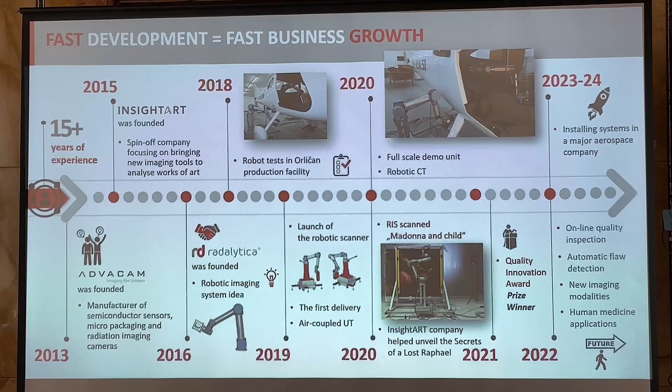It's a company here in the Czech Republic, PSI, which builds automatized greenhouses for phenotyping. They study the growth of plants, building greenhouses to study plant growth, and they measure all sorts of parameters of these plants. They wanted X-ray imaging stations, so that was our first customer. But now the focus is mostly on space and aerospace industries.

So the basic principle, I can probably go through very quickly, everybody in this room knows it. X-ray imaging is a game of shadows, so we are also measuring shadows. The difference is that we have the photon counting detector on one of those robots, and photon counting detectors bring lots of advantages for X-ray imaging, better image quality. They are opening new applications which were not possible with older types of X-ray imaging detectors. Jan Jakubek will be talking much more about photon counting detectors in detail later, so I don't want to dive into detectors.

Nevertheless, we are using smaller robots, universal robots, and we are trying to make the system portable. Why portable? Computed tomography is nowadays a very well established method in the medical field, but also very much in industry. There are all kinds of imaging systems: you can have high resolution for small volumes, you can have large volumes, you can have all kinds of industrial CT machines, including robotic ones, as we heard from Gabriel just minutes ago.

The point is, all these machines require that the sample goes to the machine. You can only inspect things that fit into the CT system or the cabinet that you have around it. However, there are many objects that are way too big to fit in any kind of CT machine. So in reality, the need is to make the system smaller again and use some different, clever approaches for how to enable inspection of such a large object, such as an aircraft or spacecraft.

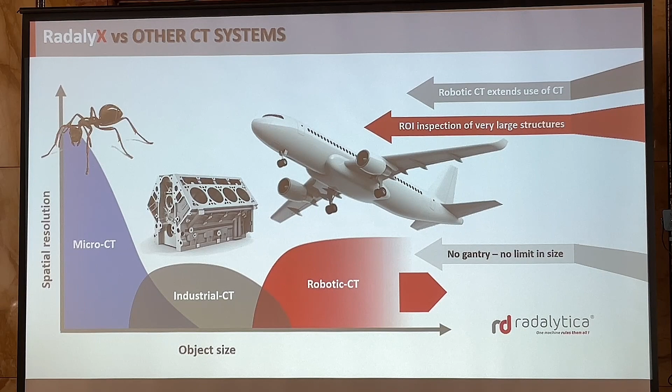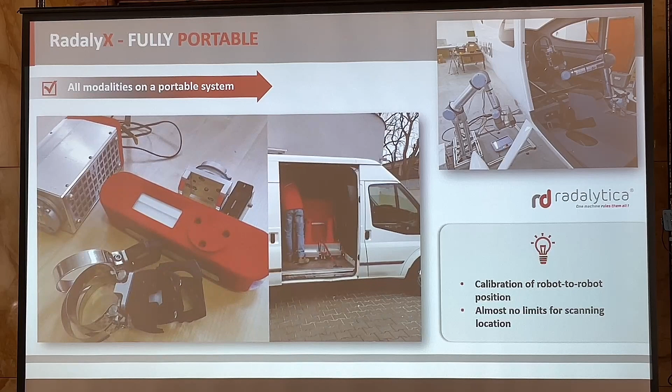So here you can see an exercise that we did for our partner, Orličan company. It's a manufacturer of ultralight aircrafts. Actually, Czech Republic is very strong in production of small aircraft, sport aircrafts.

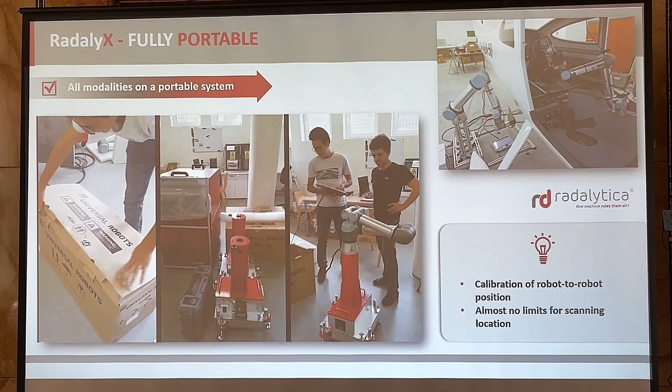About 1/3 of these aircrafts worldwide are built here in Czech Republic, so aerospace industry is quite strong. What you saw in the video, the guys are packing the system, loading it into a small van and bringing it to the factory. This is a newer exercise that we did last year.

This poor aircraft had an accident during the final phase of landing. The engine cut out because there was a problem with fuel delivery, and the pilot had to crash land about 200 meters short of the runway. During that landing, the landing gear, which was already out, ripped off, broke, and hit the skin from beneath the wing. The skin detached, and the right wing hit the ground.

So we knew that there is a detachment, that the skin is detached from the main spar, which is the support running through the aircraft. We knew it was detached, but the question was whether there was any defect inside the main spar, because that would mean that's the end of the fuselage - it would have to be thrown away.

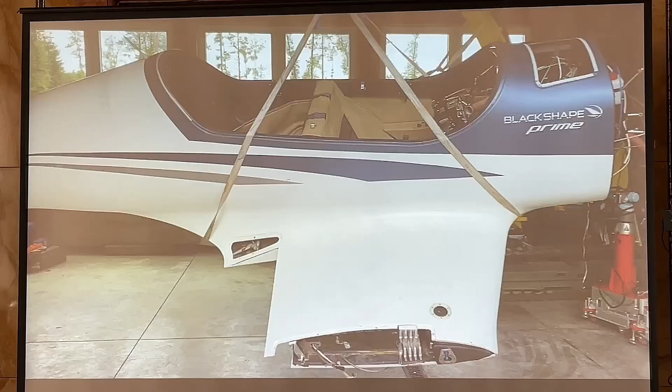So we packed the system and took it to the middle of nowhere - it's like a garage somewhere in the mountains in Czech Republic, where they are going to fix the aircraft. We had to improvise quite a bit because this was really not a spot for X-ray imaging. However, you can see the flexibility of the system.

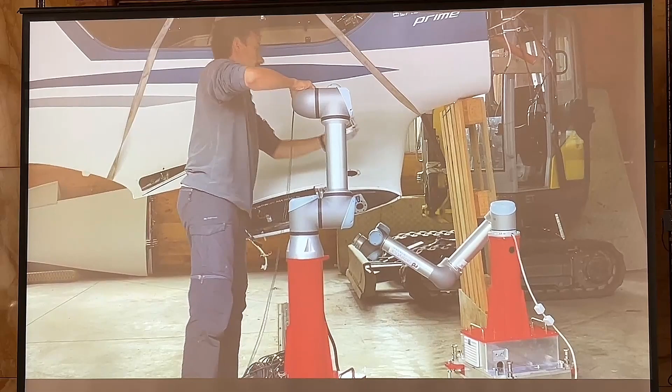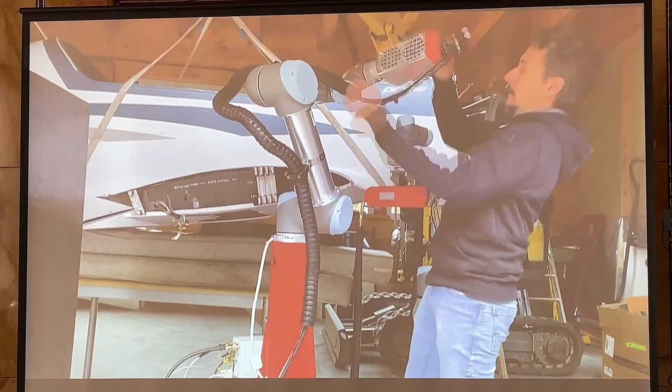We are setting up the machine, calibrating the position of the robots mechanically in this case, but we can do it with X-rays too, attaching source and detector and placing both near the location where we need or would like to measure. Then doing some more calibrations and setup in the software, and then running the measurements.

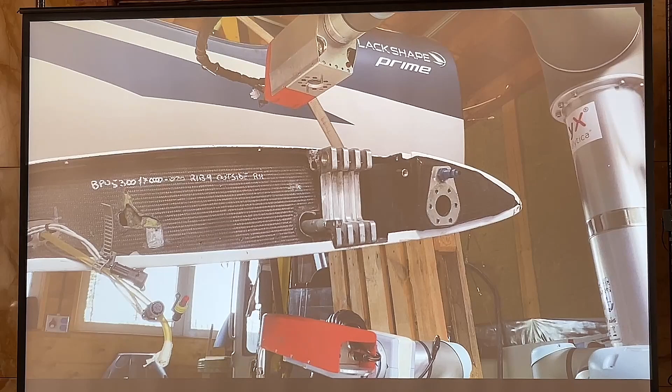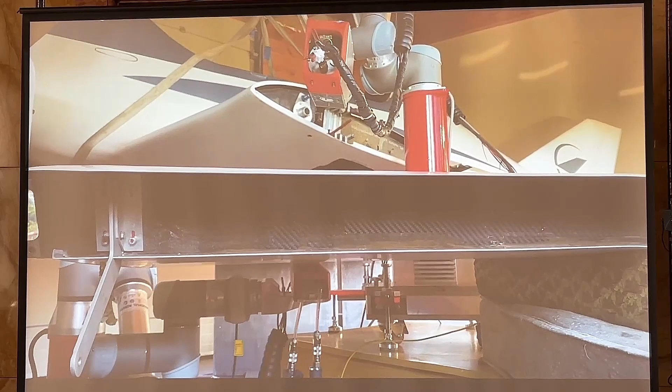So you see now the robots are measuring the main spar. Do we have a laser pointer here? So the main spar is actually here, yeah? That's a support that runs through the aircraft.

And there was a question about radiation protection. In this case, it was a combination of shielding and distance. In circumstances like here, it's relatively straightforward.

We helped ourselves with some lead screens - you can see them here. But in reality, about 15 meters away from the place where we were measuring, there was background, no radiation present. That's one thing. Second, because we have photon counting detectors, they are more sensitive, which means we can use weaker sources, and again the radiation protection is easier.

So here is one of many scans that we did on this aircraft - that's the main spar. The good news for the owner was that we did not discover any damage that would be correlated to the accident. However, there were lots of strange things happening in the layering of the carbon fiber in the material.

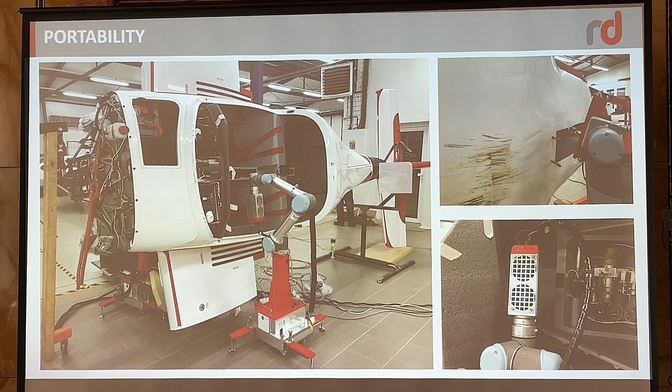This is yet another similar accident. Here, the landing gear closed due to an incorrect setup of the aircraft. The pilot didn't go through the checklist at the beginning - that's why it's so important to go through the checklist. So he didn't do it correctly, and when the aircraft was lifting off, the landing gear, because it was set to close, started closing.

It has automatic closing, but because the aircraft wasn't yet flying properly or enough, it landed up on the belly and was sliding on the grass, and it got some damage.

So again, the same story - we took the system and brought it to the hangar where the aircraft is placed, and we did our exercise of calibrating things, and we measured.

There were some cracks that were visible on the surface, but unfortunately we discovered many others that were hidden in the structures. Because it's quite an important part of the fuselage, it seems this aircraft has bad luck - they may have to throw it away. It will be difficult to fix it.

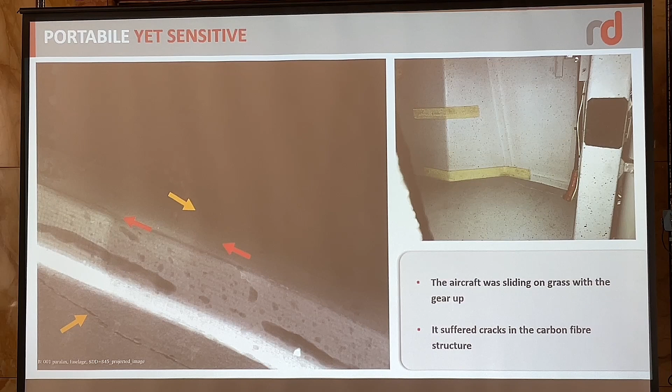Now, back to the robots themselves and the properties of imaging. One big plus of photon counting detectors for non-destructive testing, especially in aerospace, is that they deliver broad dynamic range. So what does it mean?

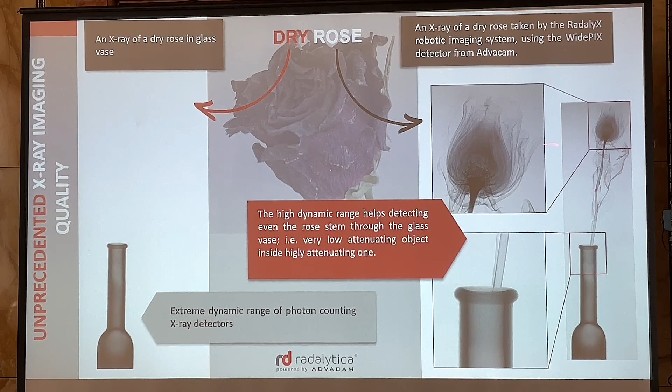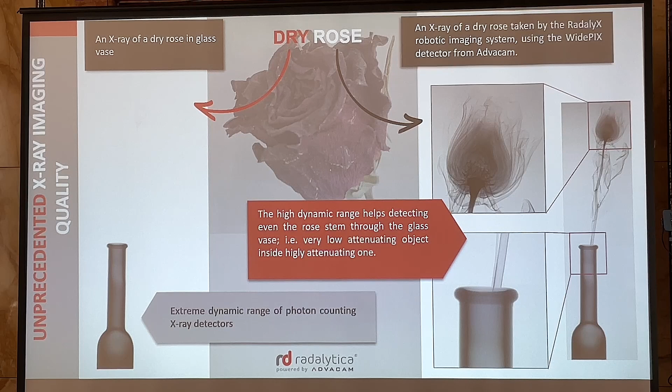In a case like this, our test object is a dry rose, where we have a glass vase and a dry flower. That's something very difficult for X-rays, because you have a very low attenuating structure here, but a relatively highly attenuating structure there. So standard X-ray imaging devices would have trouble showing everything in one shot - you would have to take multiple shots very often, and it's not that easy.

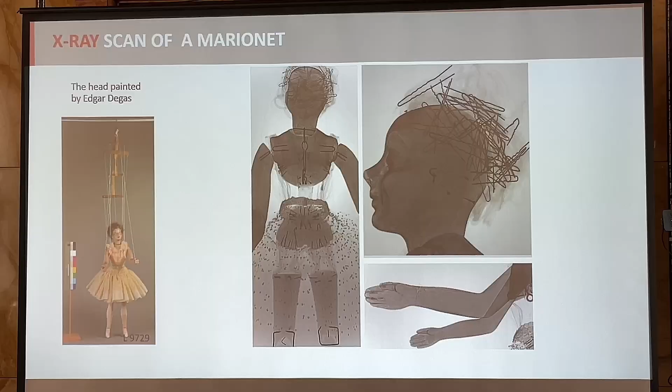But with a photon counting detector we can do it, which means in combination with robots we can really scan difficult objects in difficult situations. This is an example from art. I like it a lot - if we look here, this is the silk on the puppet, and this is the structure of the nail.

So you can see it's a massive difference in material properties from silk to steel in one picture.

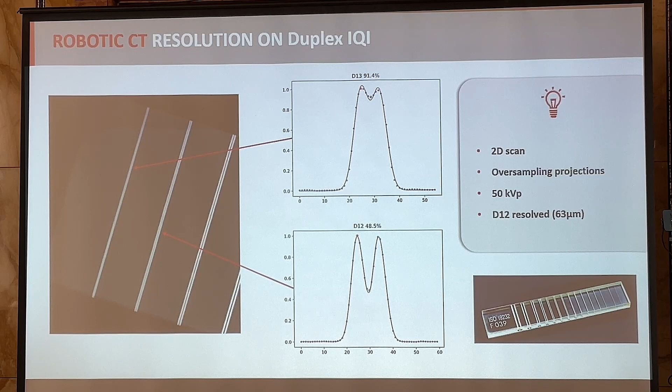In terms of resolution, the detectors themselves can resolve 50 microns. I think Jan will be talking about it. However, when the inaccuracy of the robots kicks in, the resolution goes down a bit, so we have around 60 micron resolution when scanning with the robotic system.

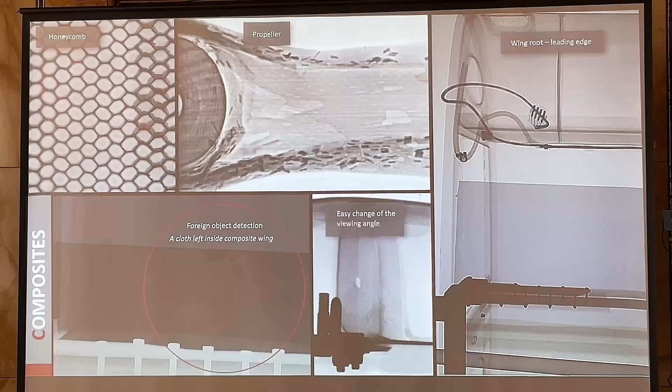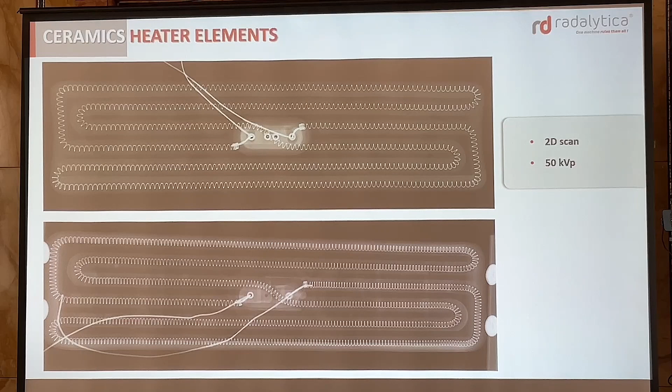So you can see that here we use 100 kilovolts. Composites were measured with 50 kilovolts, typically the same detector. We don't have to change anything.

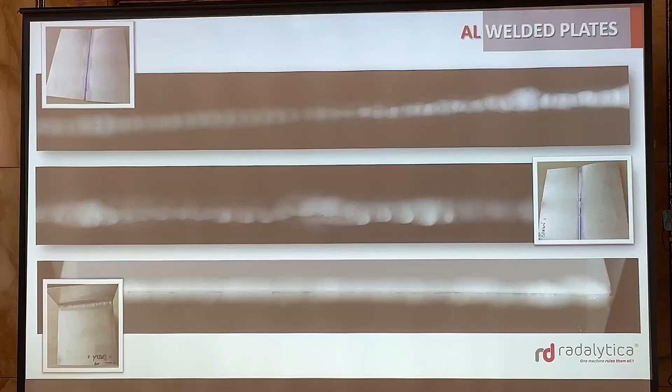So we newly integrated an X-ray tube that has a tiny spot, 5 micron spot, which means we can use magnification and magnify the images geometrically, going down to 5 micron resolution in 2D X-ray images. It's a bit difficult to do in CT because the inaccuracy of the robot would spoil it, but in 2D images we can definitely achieve 5 micron resolution.

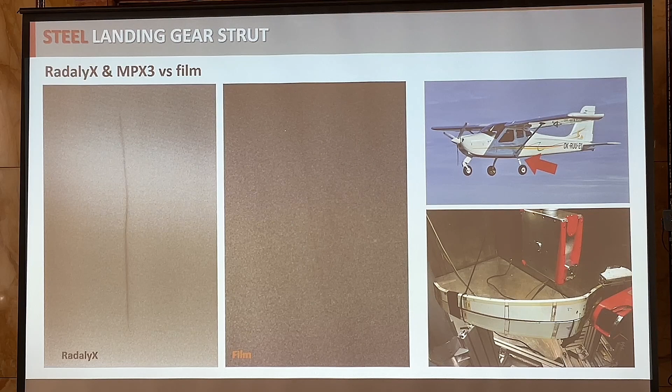And this is yet another example. It's a strut of a landing gear of an aircraft. This aircraft is particularly important for me because I sat in it several times. It's from our air club, and the guys asked me if I could check if the landing gear is okay. So we took an X-ray scan with our system, and for comparison we took also an image on film. You can see the difference is clearly visible. Film, which is still very commonly used for non-destructive testing, including in aerospace, has quite some limits compared to our technology.

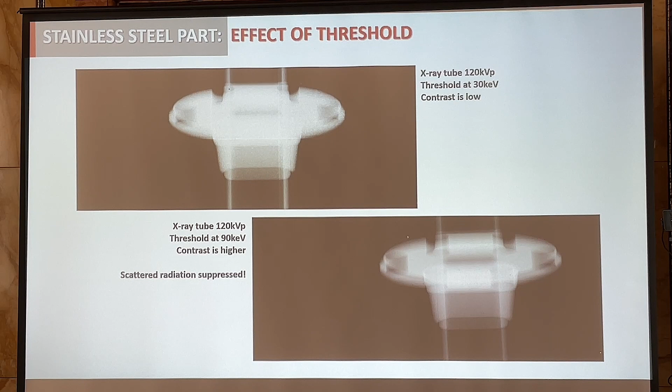And this is yet another example. That's a stainless steel part, about 3 centimeters in diameter. The top image is taken with standard settings of the detector. The bottom image is just increasing the energy discrimination threshold, so we can cut a certain part of the X-ray wavelengths and use only the higher energies, which improves the contrast in images. That's important for computed tomography and many other applications, because you need very good input images. That's always important.

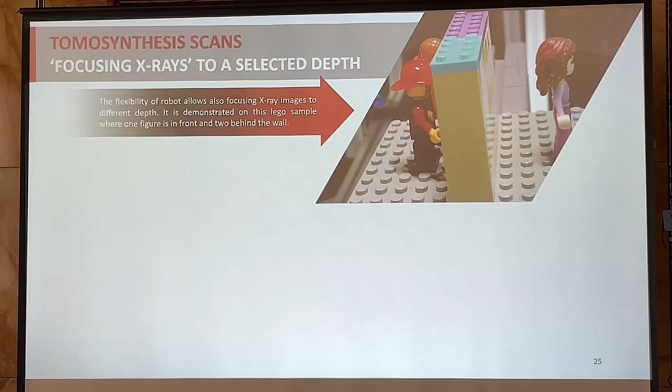So, images with focus, tomosynthesis explained on this object here. If you have a structure like that and take an X-ray image, you get this mess, all these structures on top of each other. Moreover, depending on how far they are from the X-ray source, they have different magnification. So if you're X-ray imaging something complicated, it might be rather hard to understand what you're looking at, and difficult to identify if there are any defects.

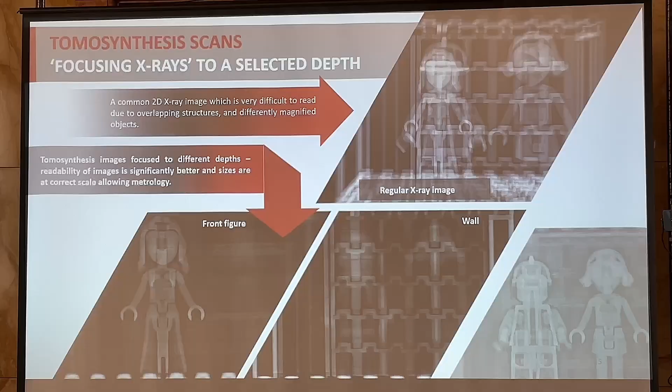However, with robots, we can just change the trajectory of the scanning, as we already saw in the previous talk. We can change how we move around the object, and in a way focus the X-rays to a certain depth. It's not a full computed tomography, it doesn't give you such good depth resolution, but it gives you good enough depth resolution to separate structures from each other. That turns out to be quite important because, first, it's much easier to understand the image, and second, defect detectability goes up because you can separate these structures from each other.

And there's another benefit. There was also a question about measuring these dimensions. In this image, it's rather difficult to measure anything because you don't know the magnification. But after processing in the computer, we have everything on a scale, so you can do basic metrology here as well.

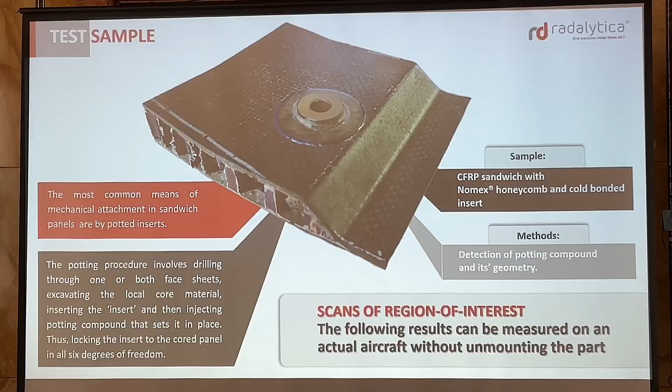So this method applied on a honeycomb, which is commonly used in aerospace. You have focus on one side, you have focus on the potting around the insert, and you have a focus on the other skin of the structure.

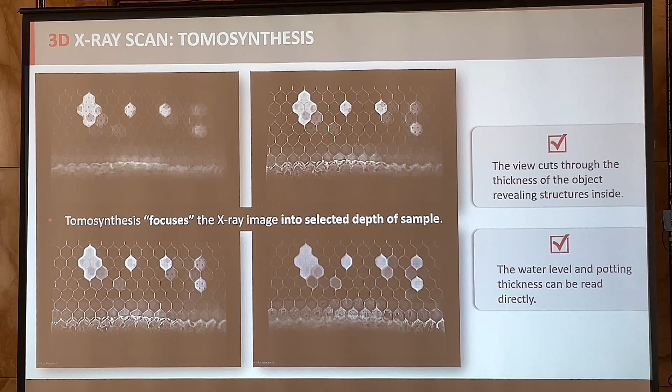Here, another honeycomb just with water in those cells. That's a big problem in aerospace. You have to avoid it because if there is water in the honeycomb and the aircraft goes up to high altitude, it may freeze and it may cause damage to the honeycomb. So water detection is quite important.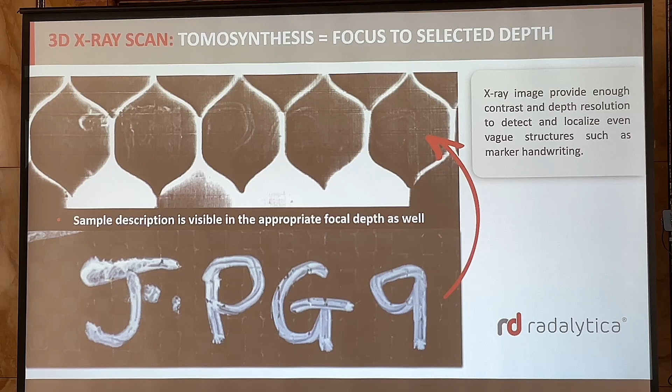And in this scan, we saw this kind of weird pattern. We didn't know what that was, and we were wondering if we had some problem with the detector, and it turns out to be a description of the sample. So it just gives you an idea how good an image the camera can measure.

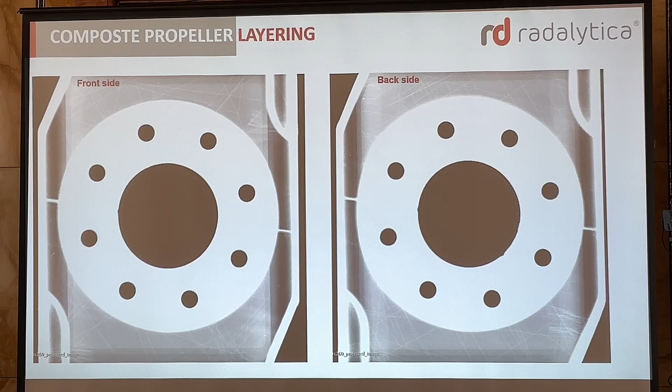It's the same scan, this picture is the same scan. Just the gray scale is changed to see the layering of the composite. So here are the layers of the carbon fiber in the same image.

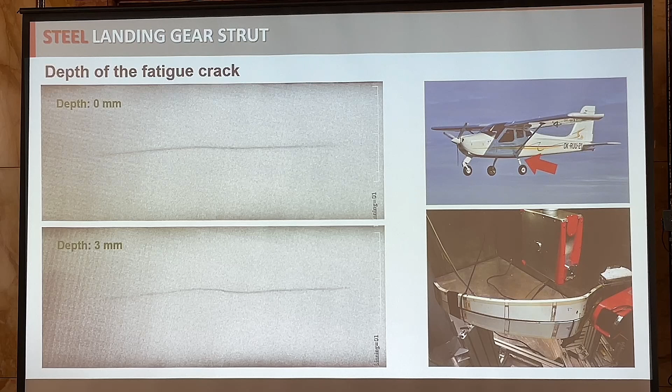And back to our aircraft. Here, because we applied the tomosynthesis, we can see how deep the crack is. So not only that there is a crack, but we can also estimate how deep the crack is, and also what is the shape of the crack at different depths.

Now there are some limitations. As I said, you don't have such good depth resolution as in the case of computed tomography, so that can sometimes be a handicap. On the other hand, the tomosynthesis is good to measure a region of interest of something really large. If you have a wing, then this is a very good method to use.

Yet still, if you would try to visualize the data that you have measured in 3D, you get something like this. It's a cube of mess. You cannot really visualize it in 3D.

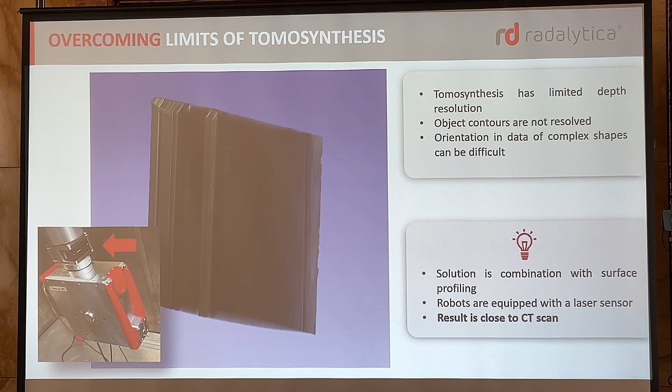And that's why we combine the tomosynthesis scan with laser profiling. So we measure the outer shape of the object and we sort of carve out the real structure from the tomosynthesis. And then the result is something which is very much close to computed tomography. That very much increases again the readability of the structure.

And for that purpose, in order to measure the shape, we have integrated this little laser tool here which measures the distances. So the robot first scans the shape and then we use that within the reconstruction.

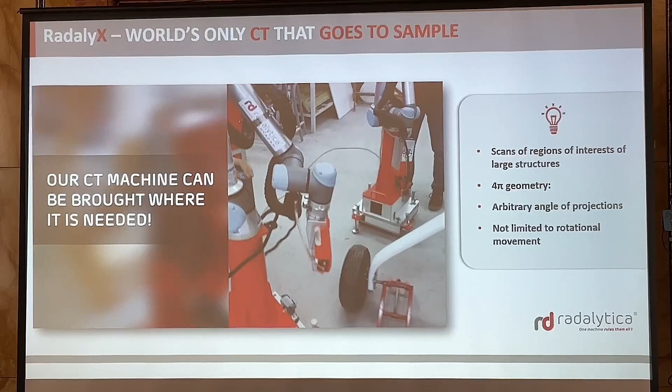Now, if the structure allows, if we can rotate around, we can go to full 3D. So you can see the guys are moving again the system to the aircraft, positioning it freely. This is a big advantage of the collaborative robots.

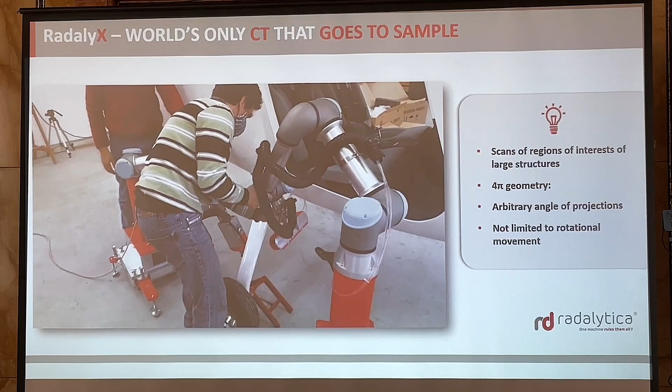I forgot to say that we are using Universal Robots, so those are meant to work with people on production lines. When they feel a collision, they stop.

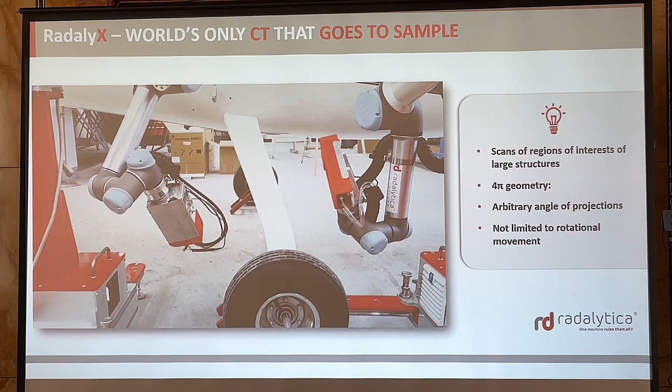For us, it's not really an advantage for preventing collisions with humans, because no one can be around when the X-rays are on anyway. But it is very useful to prevent collisions with the sample. And also, it gives us an option.

We can also manually position the robots in the location. That's quite a big benefit.

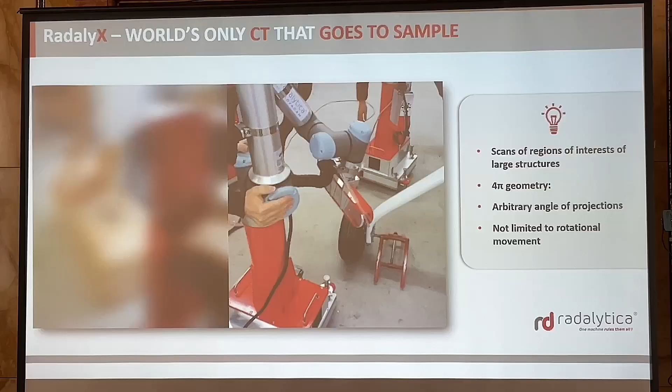Nevertheless, so the system: the source and detector rotate around the object and we measure a full CT, as we saw in the previous talk. And here are the results of such scans, all sorts of things, again honeycomb.

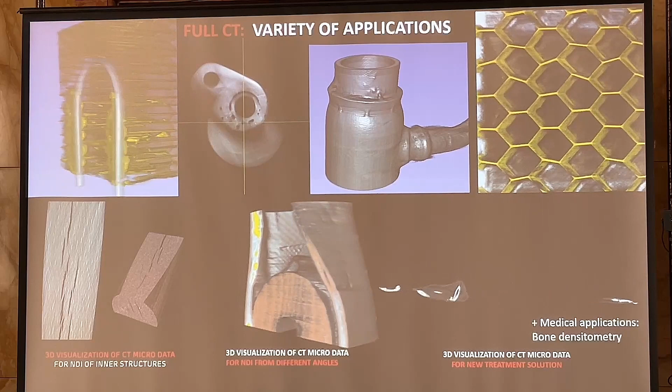In this case we have a stainless steel pipe inside the honeycomb, so we were able to suppress all kinds of artifacts that are normally present. Automotive parts, even some preclinical research — the application range is very, very wide.

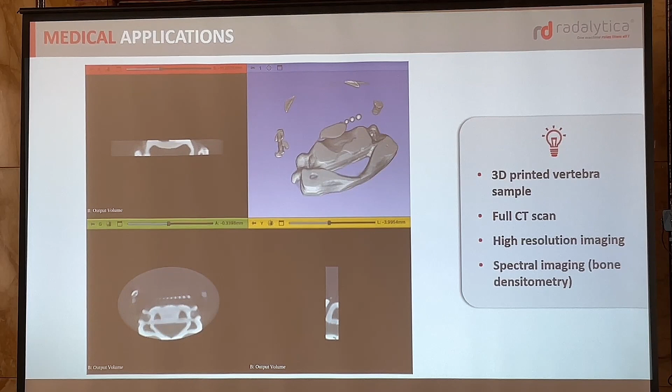Some first results for medical applications: it's a vertebra, it's a 3D printed piece, and we were testing how far we can go with the resolution.

And the automotive bits and pieces — Czech Republic is of course big on automotive — so detecting some porosities in here. This is nice stuff.

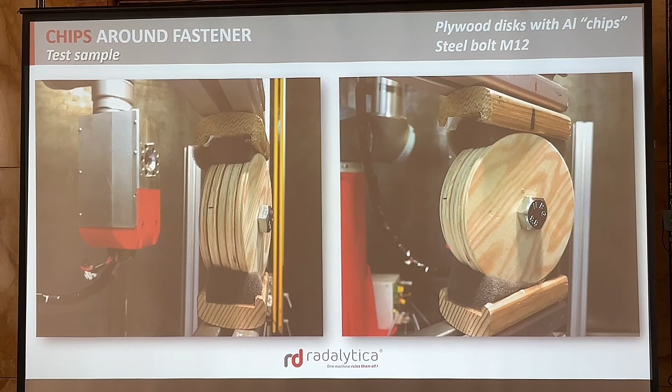The real thing we cannot show, so it's just a surrogate object. Let's say that you have a structure of light materials, and then you have a fastener which is titanium or steel, basically something heavy, and you have a defect underneath that. So if you take a standard X-ray image, any defect is kind of shadowed by the high attenuating piece of the material which is there.

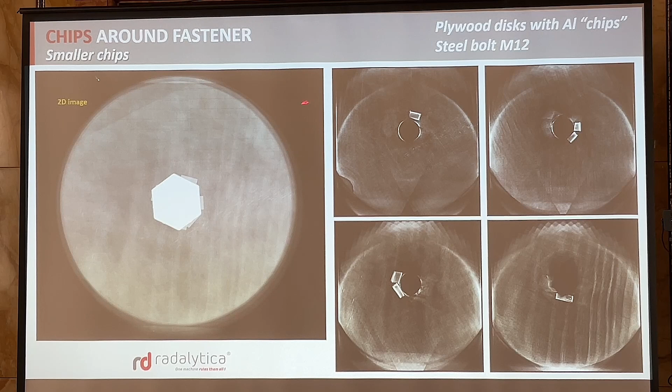You can see stuff only if it's protruding from beneath the head. But because of the flexibility of robots, we can sort of peek underneath the fastener head, and we can look around the fastener, and we can see any kinds of defects or foreign objects all the way to the screw or the fastener itself.

So that's really the beauty of robots and the flexibility it gives you.

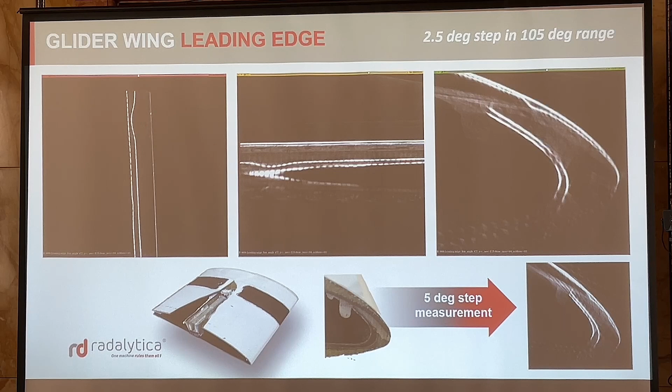This is yet another example of a glider wing, and in this case we measured only a 105-degree range, so we couldn't measure full computed tomography. Yet still we are able to see all sorts of defects and porosities in the leading edge, even some sort of dent in the layering. And if we do 3D visualization, we see it looks like somebody pressed a finger against the layers when they were putting it into the mold.

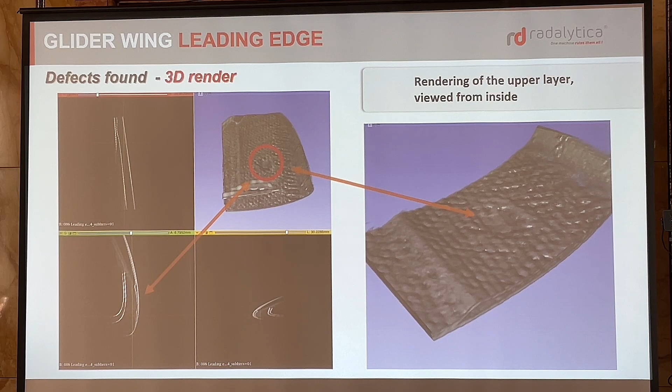Now, I mentioned robot-to-robot calibration. One way is to connect them mechanically and calibrate the mutual position of the robots, but that's not very practical if you have a really large aircraft and would like to have one robot inside and the other outside. So for that purpose, we developed a method to calibrate using an X-ray beam. The beauty of that method is that it's independent of the structure, so even if you are shooting through something complex, we can still calibrate the mutual position of the robots and then use them for computed tomography.

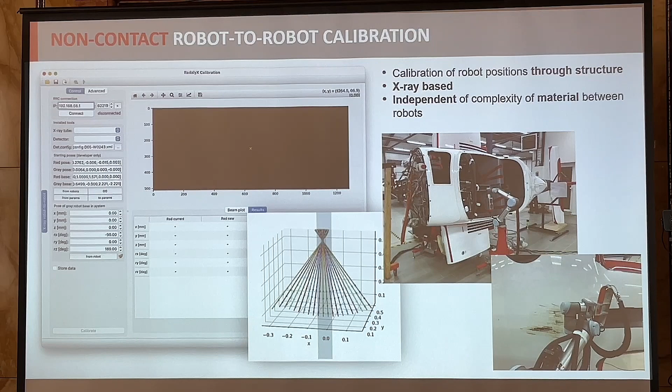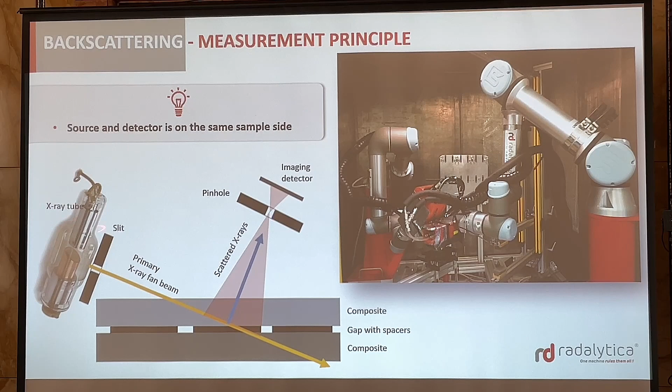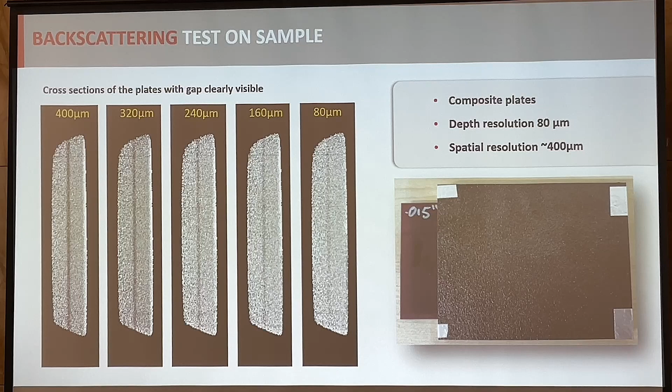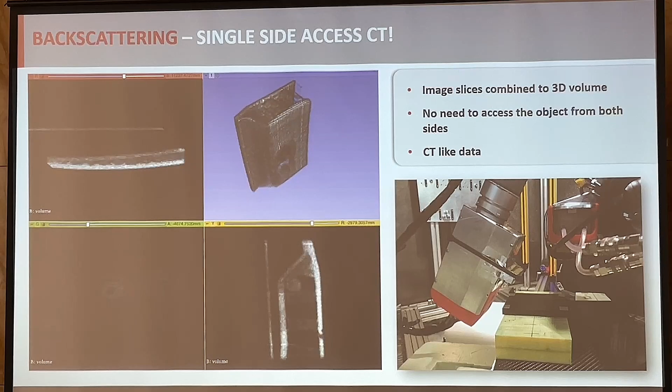And then there are lots of other methods, like X-ray backscattering. You will hear about these methods in other talks. The point is that we can have both the X-ray source and detector on the same side of the object, and scan from one side with X-rays. That's one benefit. The second benefit is that we can measure, for instance, gaps between large panels, something which otherwise would not be visible in X-ray transmission mode. Ultrasound would tell you there is a gap, but it wouldn't tell you how large the gap is. This method can give an estimate of how large the gap is between these panels. And because we have robots, we can scan and do some clever approaches, measuring single-sided computed tomography, if you want, with backscattering.

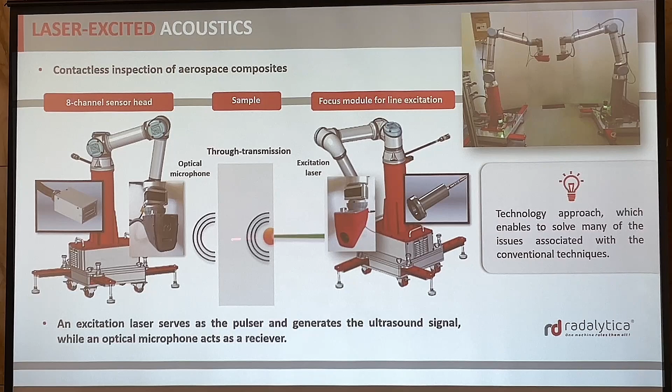For that purpose, we have integrated so-called laser-excited acoustics. That's a method where an excitation laser hits the surface, generates a shock wave that propagates through the object, and then we listen with a microphone from the other side. Robots are important in this case because, especially in aerospace, nothing is flat - very few parts are really flat. So robots are good for navigating along curved objects.

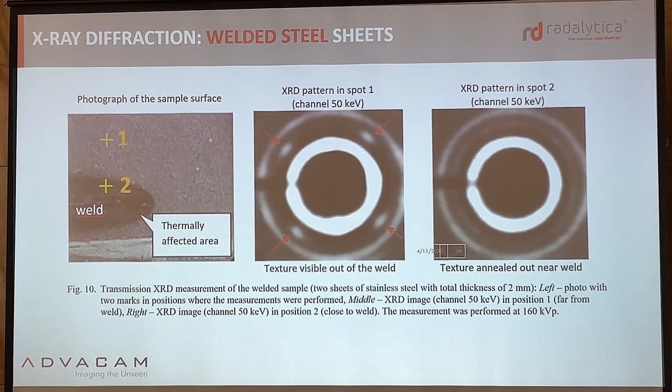And more modalities - X-ray diffraction. This is something we believe has massive potential. Jan Jakubek will be talking about it later today. In this case, you can see the X-ray diffraction pattern measured in and outside of the heat-affected zone of a weld. That's something which really has massive potential for all kinds of applications in production. And then Dr. Kotterli will speak about application in

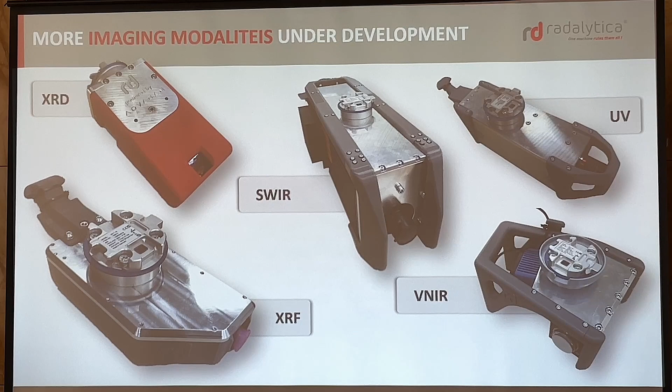forensic analysis. For that purpose, we are adding more modalities, such as all kinds of hyperspectral cameras, X-ray diffraction, as I said before, and X-ray fluorescence, and hopefully more will come later on. Again, you will hear about it in other talks.

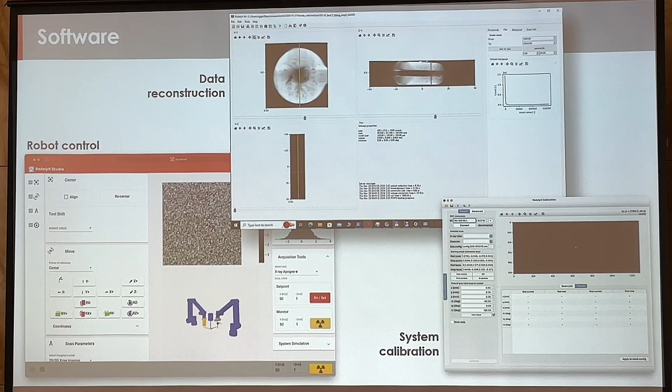And software - everything is revolving around software. I think we did already quite a good job developing user-friendly software that shields you from the complexity of robots, and still gives you good flexibility in measurements, data reconstruction, and calibration. All that is quite important.

So to wrap it up, sometimes we joke that we are building like a Swiss knife for non-destructive evaluation. You attach to the robotic platform the modules suitable for your job, and then you do your measurement and choose whatever is suitable for your case. So thank you very much.